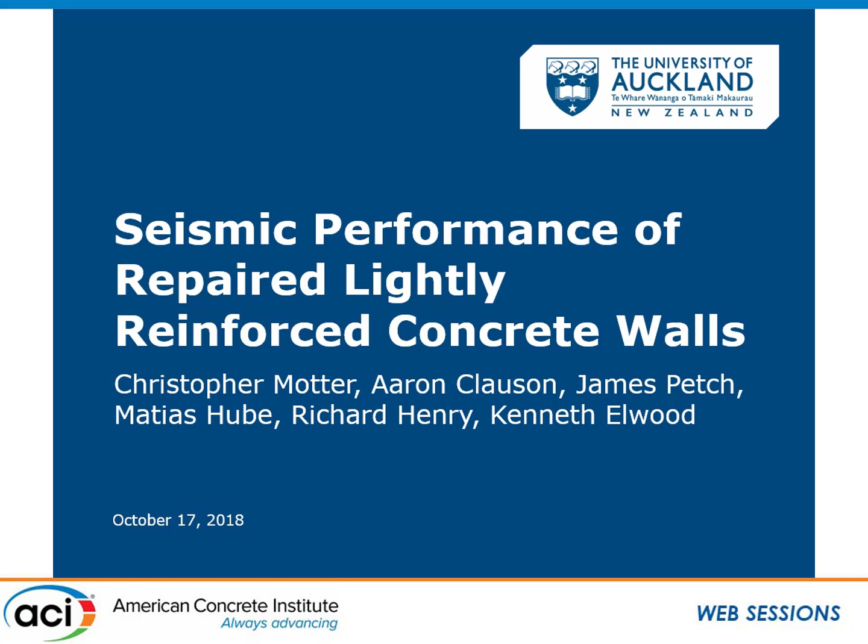The motivation for this research was the Canterbury earthquakes in New Zealand: the significant financial losses that occurred in those earthquakes, the time that the Central Business District was closed after the earthquake, and all of the assessment that went on afterwards to decide if structures needed to be repaired or could be occupied in their current state, and things of that nature.

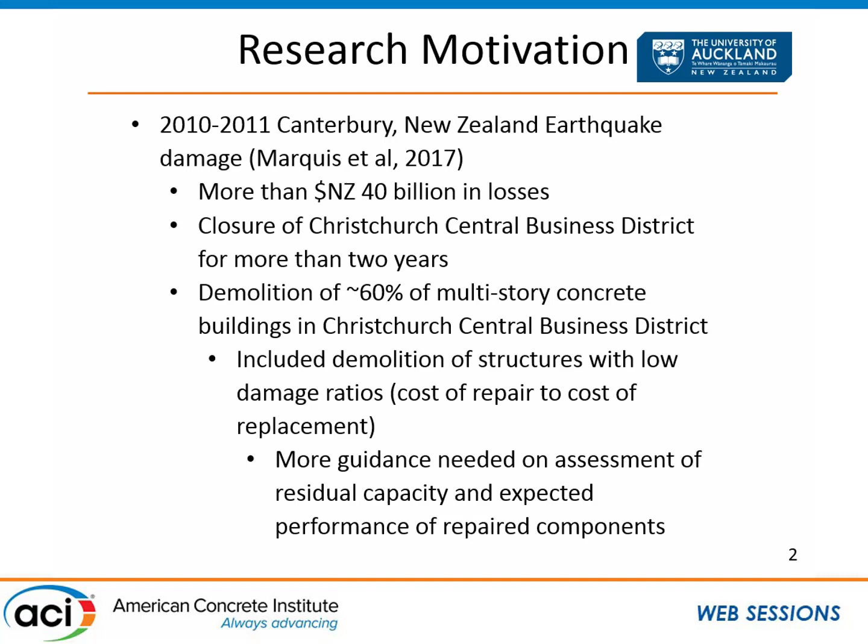In that process, there were a number of buildings that were demolished that had low damage ratios - the dollar amount needed to carry out the repair versus the dollar amount needed to replace the building. Some of that had to do with the structure of insurance in New Zealand at that time. But based on these numbers and stats, it was very clear that more guidance was needed on the assessment of residual capacity and repair.

The focus of this particular talk is going to be on structural walls. Here you see examples of damage that had occurred in the earthquake to structural walls, showing different types of failure modes - crushing failures, bar buckling failures.

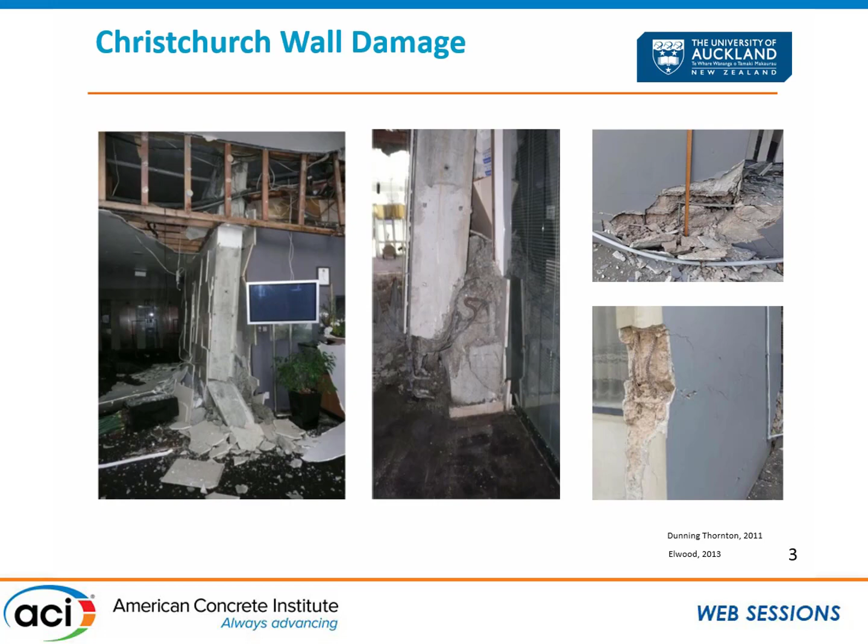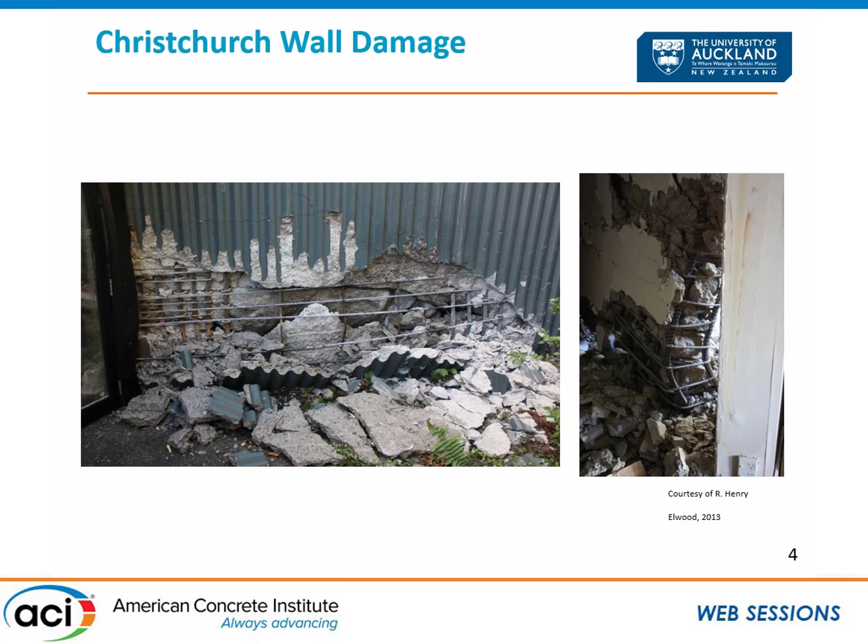On the next slide, there's an example of an out-of-plane buckling failure of the wall. Some of these walls were pretty well detailed, so these aren't necessarily older walls with deficient detailing. Some of these are more modern designs where we're seeing fairly heavy damage in the structural walls.

In our study, we are focusing on walls and looking at heavy repair. Ken is going to present a little bit later on repair methods for moderate damage, but this is really focused on repair to severe damage - cases where we need to replace concrete and replace reinforcement.

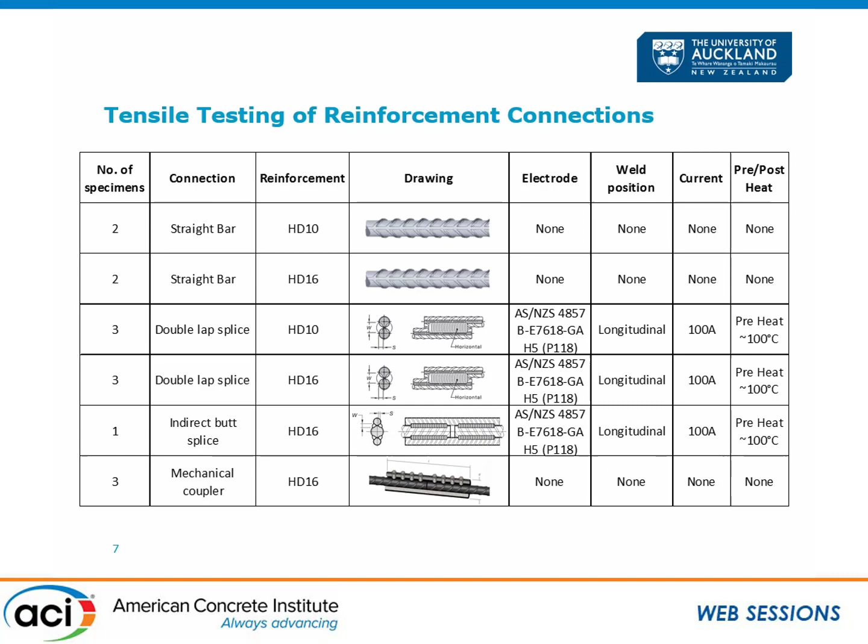We were looking at a double lap splice weld where the bars just overlap. We're looking at a butt splice weld where two bars come together and there are little splice bars along there that provide the connection. And then we also looked at mechanical couplers as a way to make that rebar connection. All of this came right out of the New Zealand standard on these welded connections.

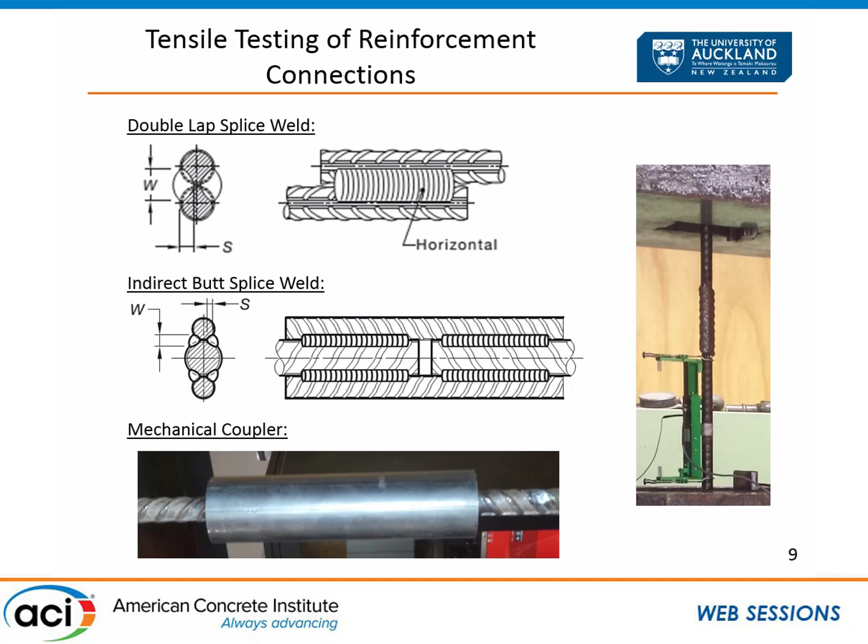This is showing examples again of the splice welds - the double lap splice weld and the butt splice weld, and then the coupler, and our rebar testing apparatus. The lap splice welds, not surprisingly, due to the eccentricity in those welds, created some bending moment on the bar itself right at the connection, and so those fractured early - they fractured at the connection earlier than the fracture would have occurred in the rebar.

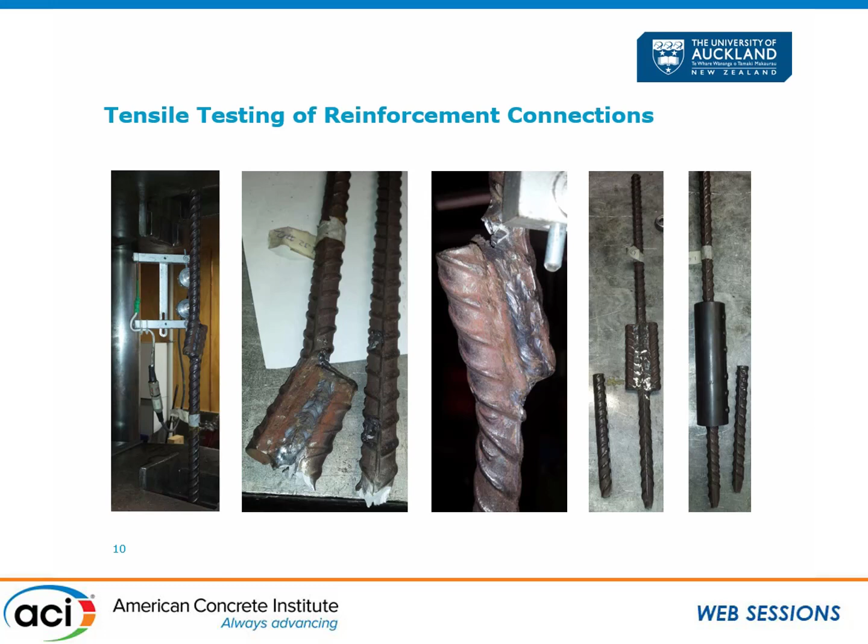Again, the double lap splice welds are not up to New Zealand standard. They had fracture before the strain had reached the elongation limit in the standard.

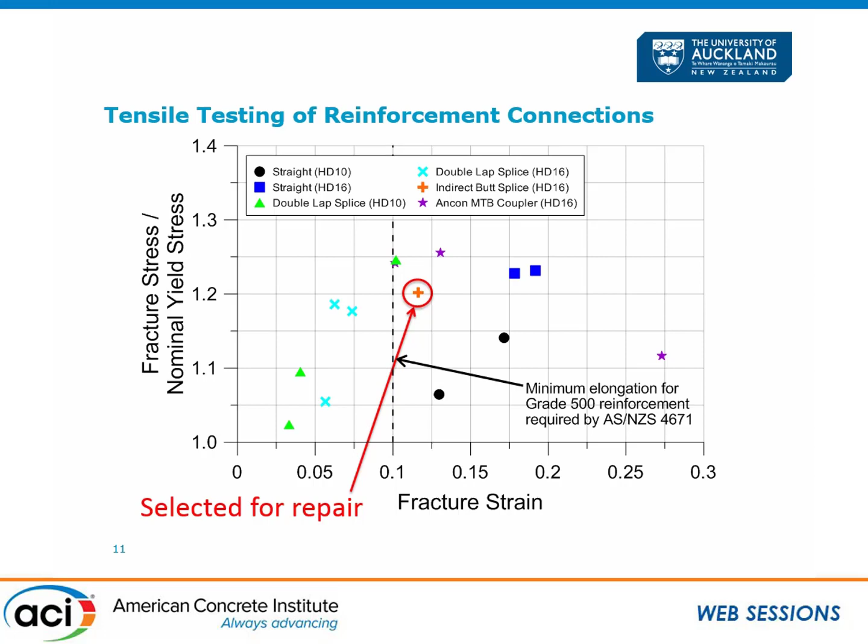So based on this, we were either going to go forward with the coupler or with the indirect butt splice, and we decided to move forward and use the indirect butt splice in our wall repairs. The coupler we decided was kind of bulky and a little bit hard to implement, so we went with this approach.

So I'm going to show now the test specimens. There were 2 test specimens in this program, and these were just leftover test specimens from completed tests that we had done as part of a previous study looking at minimum reinforcement requirements in walls. So these walls were lightly reinforced. They meet the minimum requirements in New Zealand, which are pretty similar to the minimum requirements in the United States.

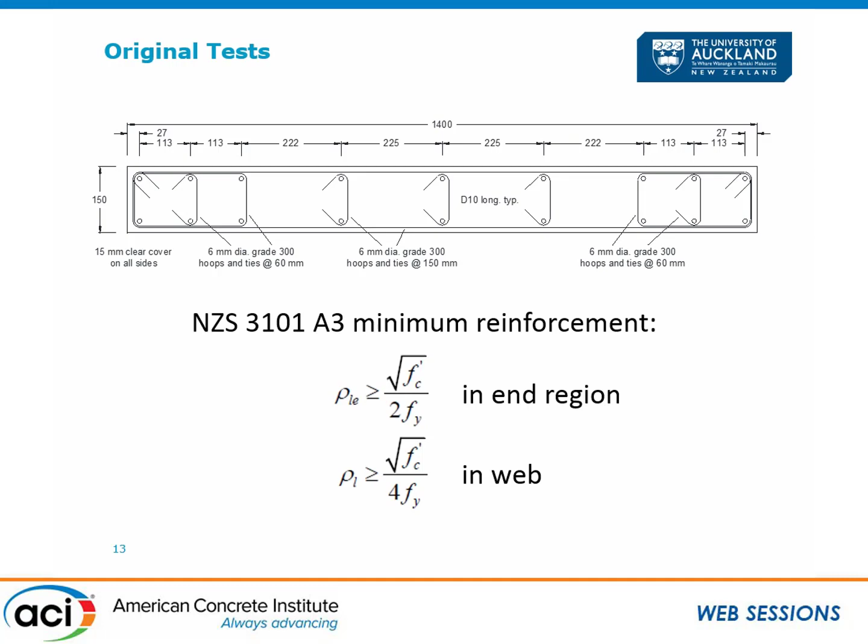I should point out those units are SI units rather than US units. But the walls did have boundary elements at the end, as you can see there, but generally very lightly reinforced. So this is a look at the load deformation response from the original 2 tests.

We're calling these M5 and M6, and I'll refer to that call out as we go along. M5 was a wall that was tested under a standard cyclic protocol. M6 was a wall that was tested under an earthquake record.

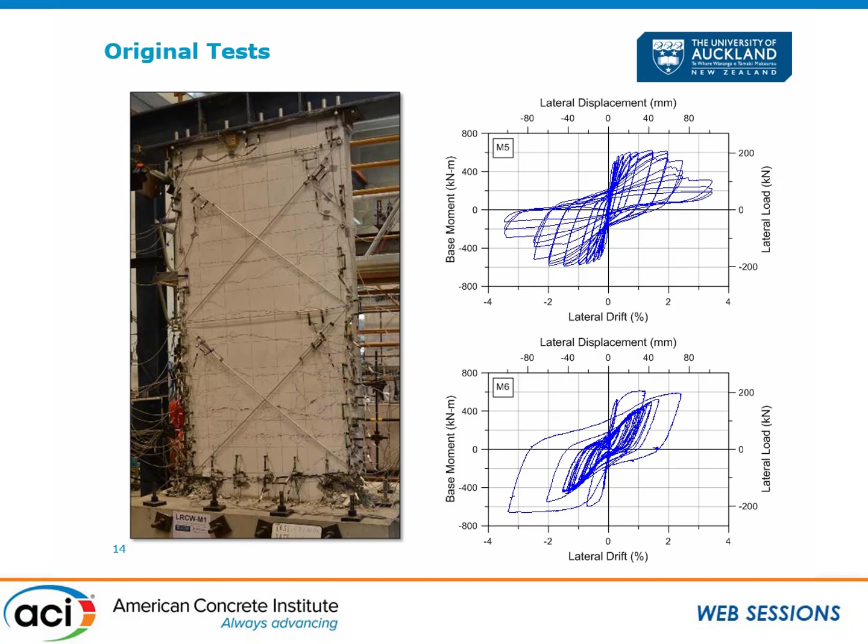So a nonlinear time history analysis was run to come up with the response of the wall in a particular ground motion, and then that response was used to test the wall. The first one was tested essentially to a state of failure, whereas M6 was actually not tested to a state of failure. So we had very different levels of damage at the end of the test.

You can see on the left there, M5, we have more damage in the boundary elements, crushing that's extending into the web. And for M6, we had more modest damage at the boundary elements and a lot of cracking through the wall.

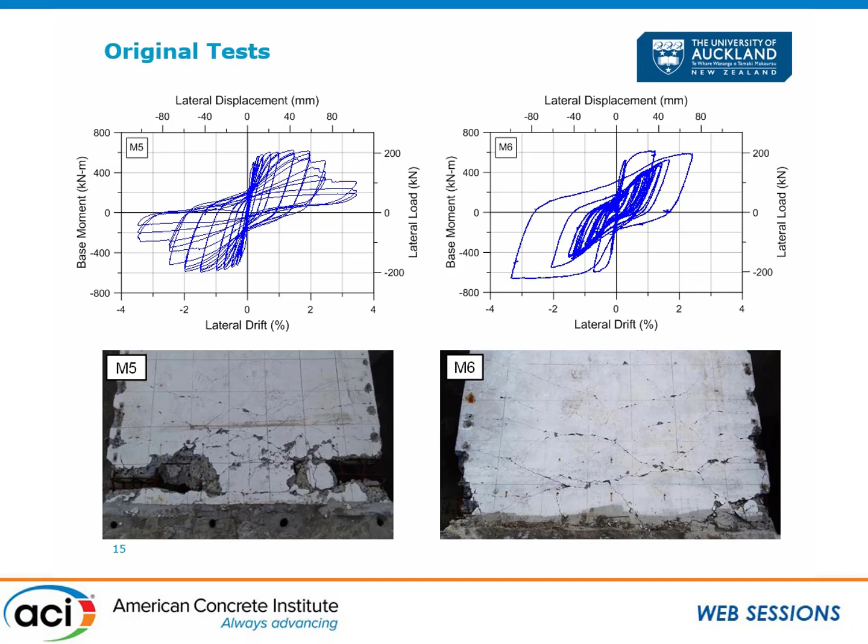So given the difference in the level of damage to the 2 walls, we made a decision that we were going to explore different repair techniques, different levels of repair for both of these walls. So for M5, and the designation I'm going to adapt now, the R indicates repaired wall. So M5 is the original wall, M5R will indicate the repaired wall.

So for the repair of M5, we decided that we were going to replace all of the concrete and all of the reinforcement essentially over the plastic hinge length. So the whole bottom region of the wall there, we're going to replace all of the concrete and reinforcement.

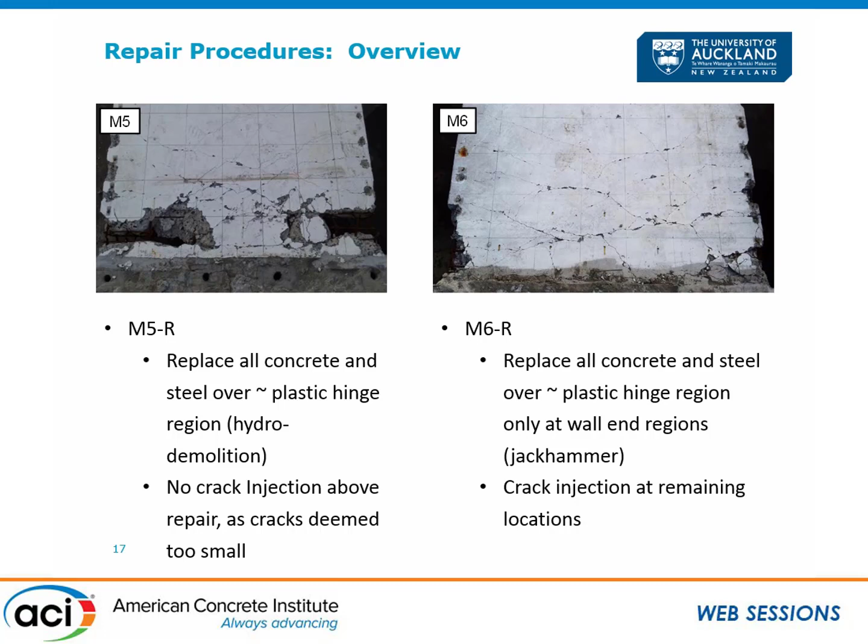For M6R, we decided that we were just going to replace reinforcement and concrete at the boundary elements. We weren't going to do replacement in the web, so crack injection in the web. So just showing schematically what that looks like.

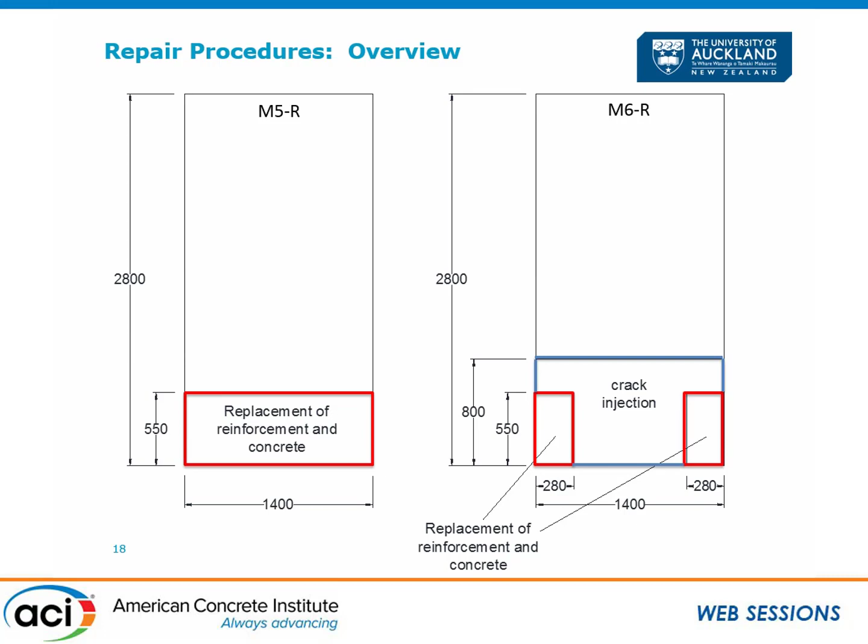For M5R, we're replacing the full plastic hinge, and then for M6R, just replacing at the boundary elements and doing crack injection in the middle portion of the wall.

So I wanted to go through the repair procedures that were used here. This was M5R, and we cheated a little bit for the repair. In an actual building, the walls would still have gravity loads on them.

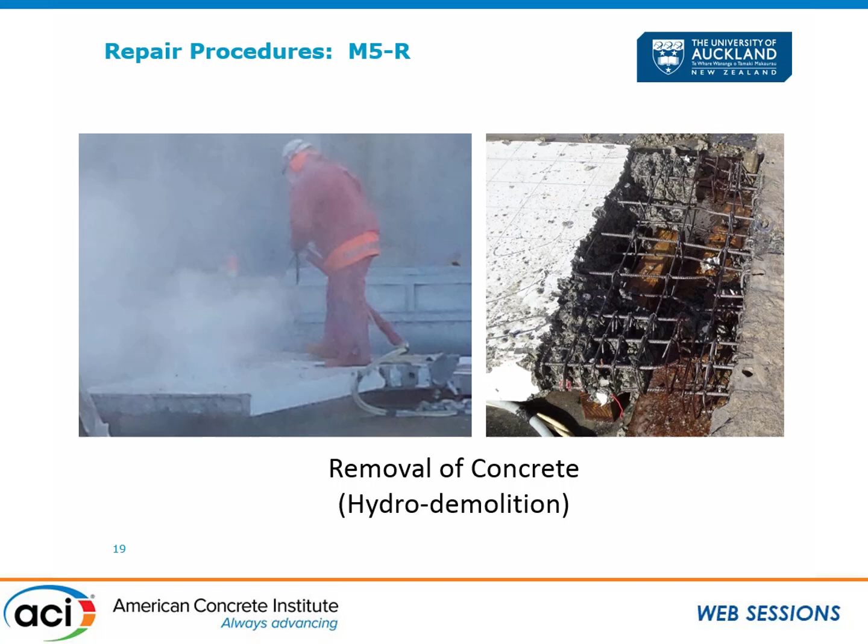It started off with hydro-demolition of concrete. This was a pretty cool procedure to watch. It's a water jet at high pressure that essentially blasts away all of the concrete and leaves you just with reinforcement. So the first step was hydro demo of all the concrete down in the plastic hinge.

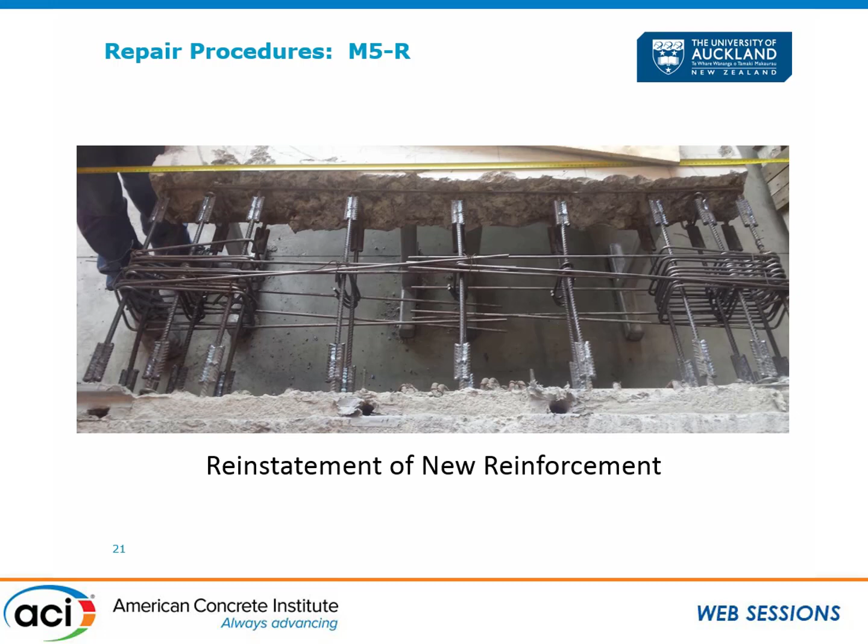Then we cut out all of the rebar and aligned everything back together, and then we reinstated the reinforcement. So this is where we were using the indirect butt splice welds to put in the new longitudinal reinforcement and also providing new transverse reinforcement as well. And this is what it all looked like when the new reinforcement was all tied up and ready to go.

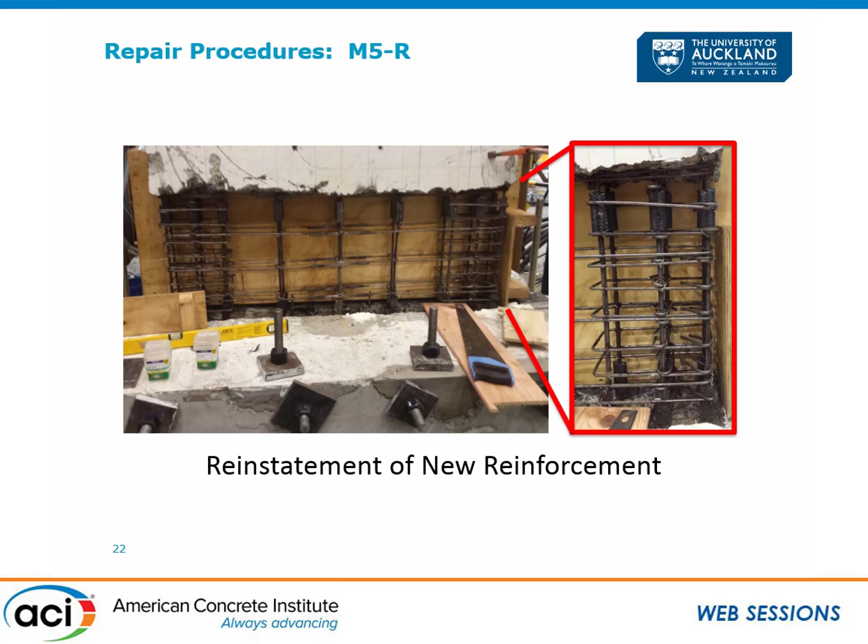We built formwork around the repaired region and used repair mortar to complete the repair. We didn't actually pour concrete into the specimen; we used repair mortar instead, poured right through a small opening at the top. There would have been formwork on this, but I'm showing a photo without it, poured right into that opening to complete the repair.

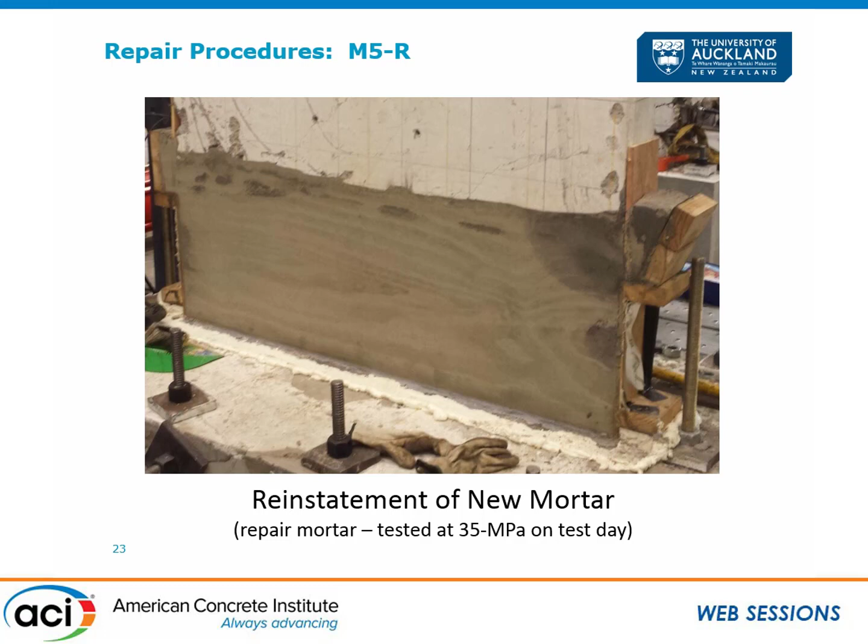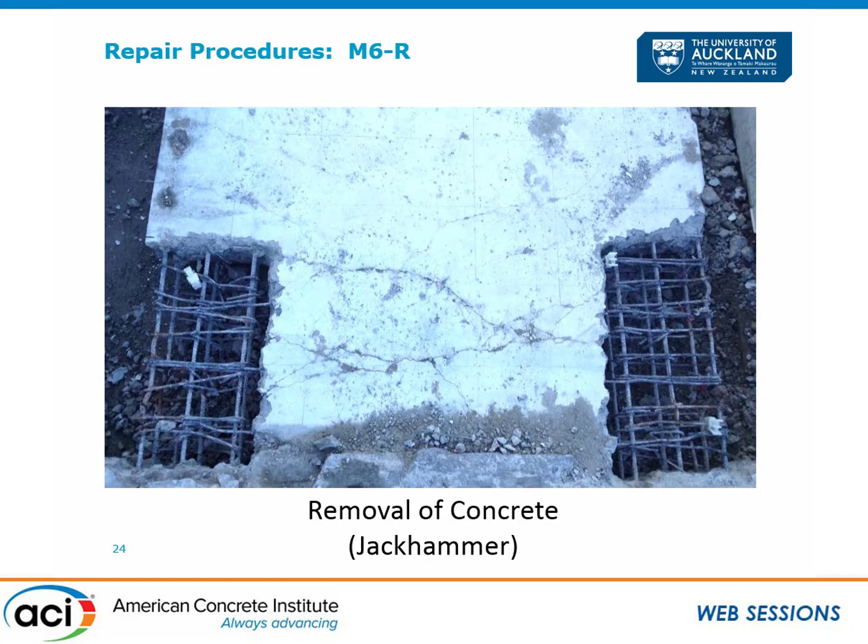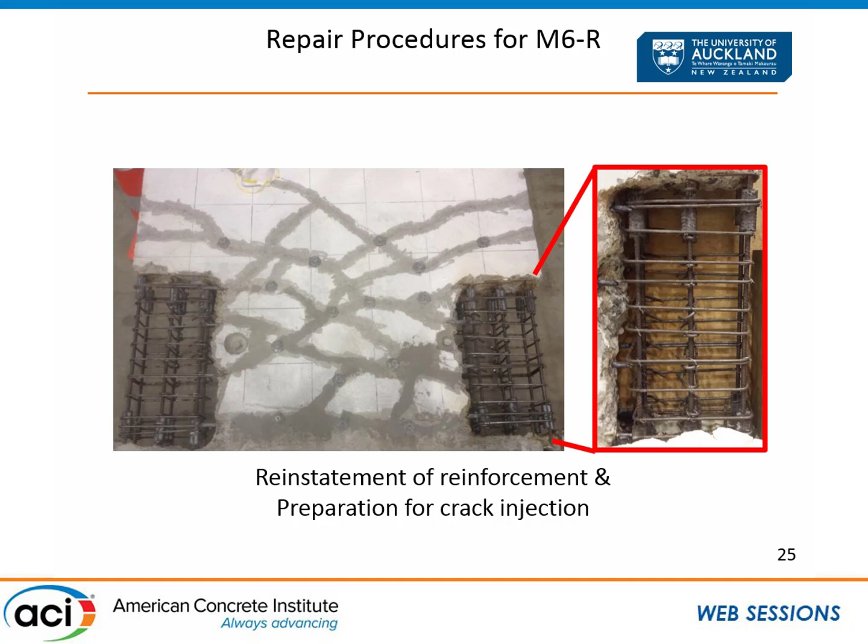For M6R, this was the one where we just repaired the boundary elements. We used jackhammers to break away all the concrete, expose the steel, and followed the same process as for M5R. We replaced all the reinforcement at the boundary element using indirect butt splice welds to reinstate the rebar in that damaged region, and also prepared it for crack injection over the cracks. Then again, poured repair mortar in through an opening to complete this repair procedure.

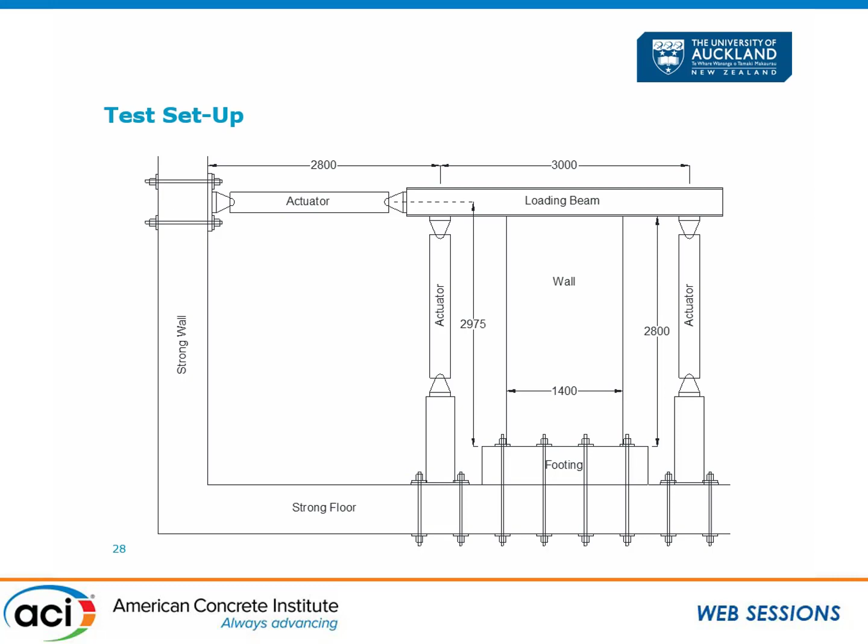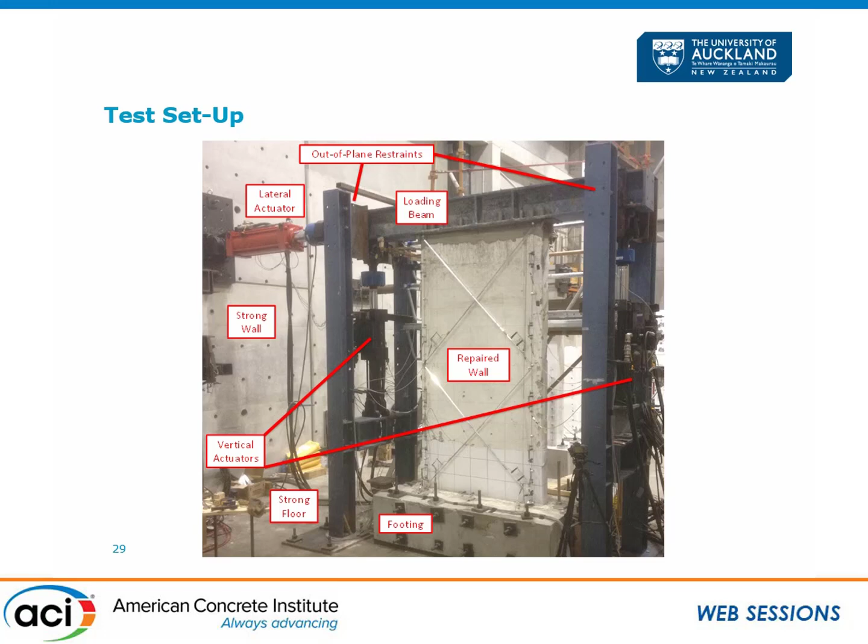You can see the repaired wall there with the nice shiny repaired region down at the bottom. We had some out-of-plane restraint on the loading beam to make sure everything was tested in plane. So it's just an in-plane test that we're doing on the wall.

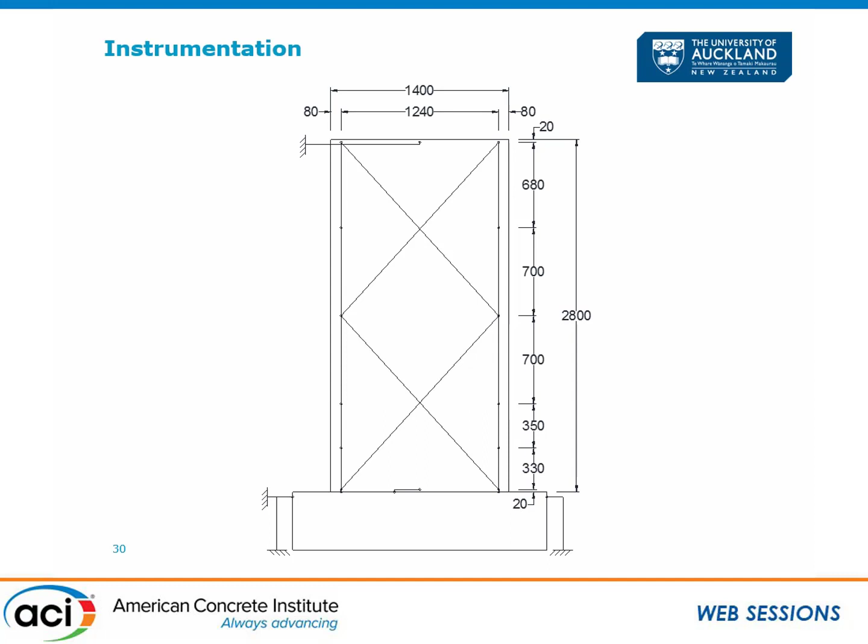Instrumentation is shown here. It wasn't a particularly heavily instrumented test, but we had enough sensors to get the sources of deformation - deformation from shear, deformation from flexure, sliding down at the base - and break down those components of deformation.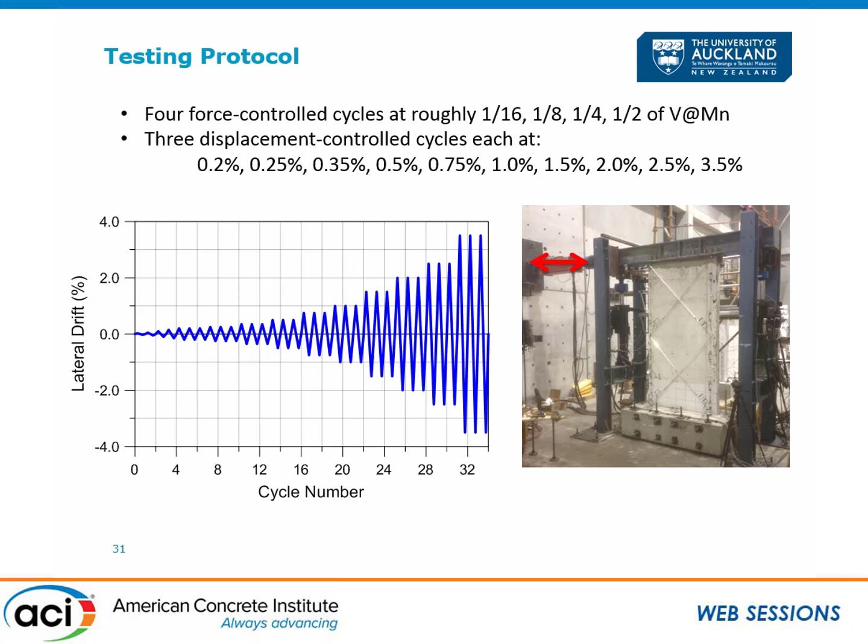For the testing protocol, we used a standard cyclic testing protocol for both tests. If you remember, one of the original tests had been an earthquake protocol, but when we did the repaired test, we used a standard cyclic protocol. So most of my comparisons are going to compare to the original test that had the standard cyclic protocol.

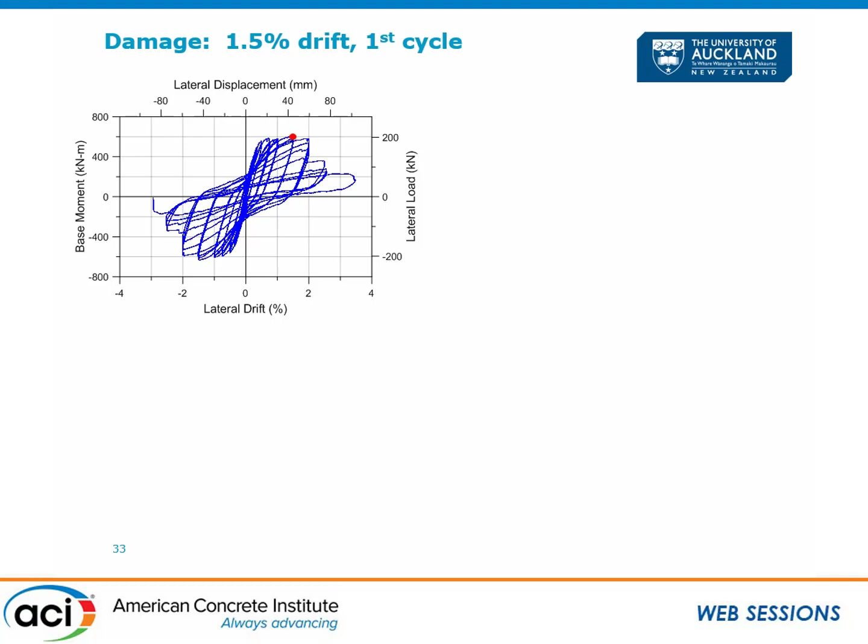Getting now into the test results, I just wanted to quickly go through the progression of damage that we saw in the test. This is just one example - M5R. There's the load deformation response in the upper left-hand corner there. We got out to about 1.5% drift, and this was the state of damage at that point.

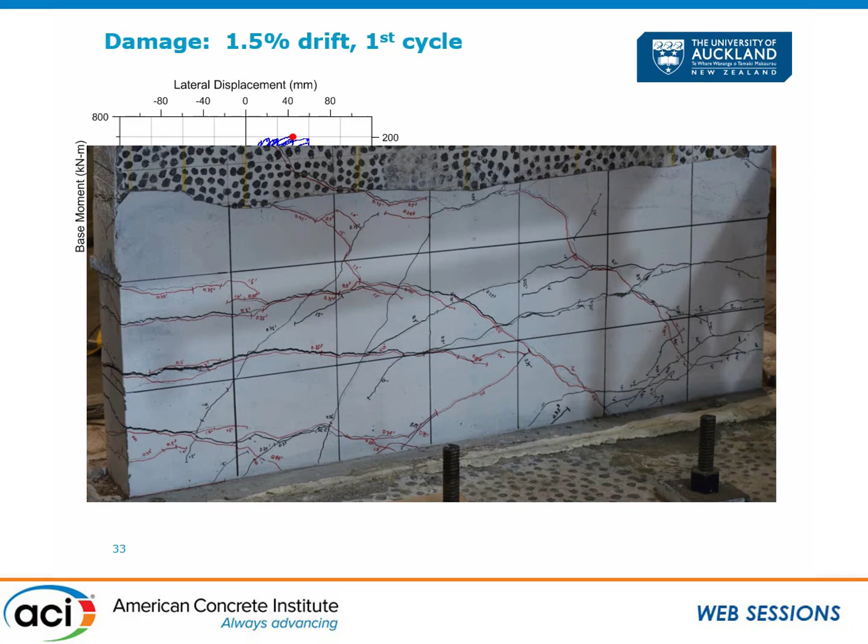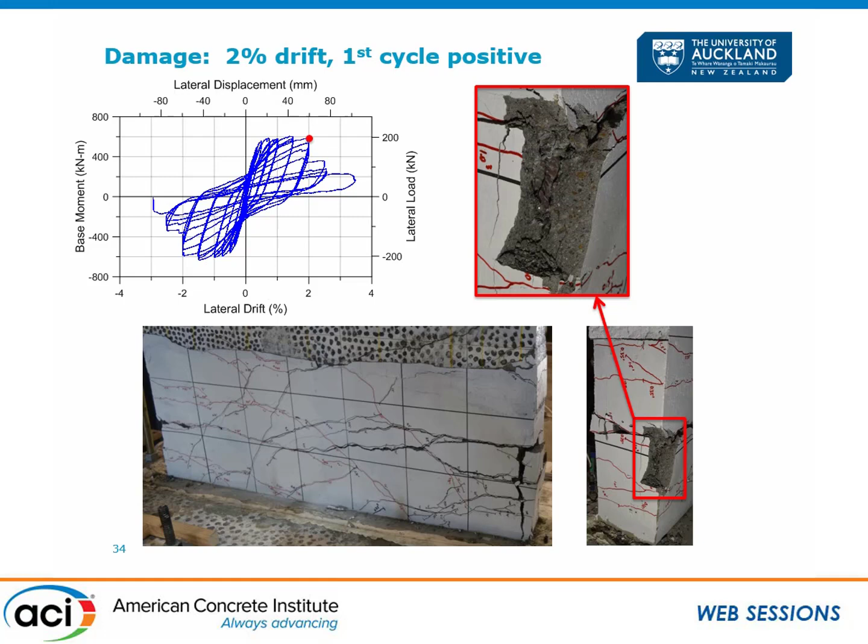Certainly there was cracking as we would expect, but we didn't see spalling at that phase of the test. Then as we got out to 2% drift, we got some spalling of cover concrete, and that was where we first had buckling of reinforcement. Same thing in the negative loading direction - we picked up our first bar buckling at 2%, spalling and bar buckling, and it progressed from there.

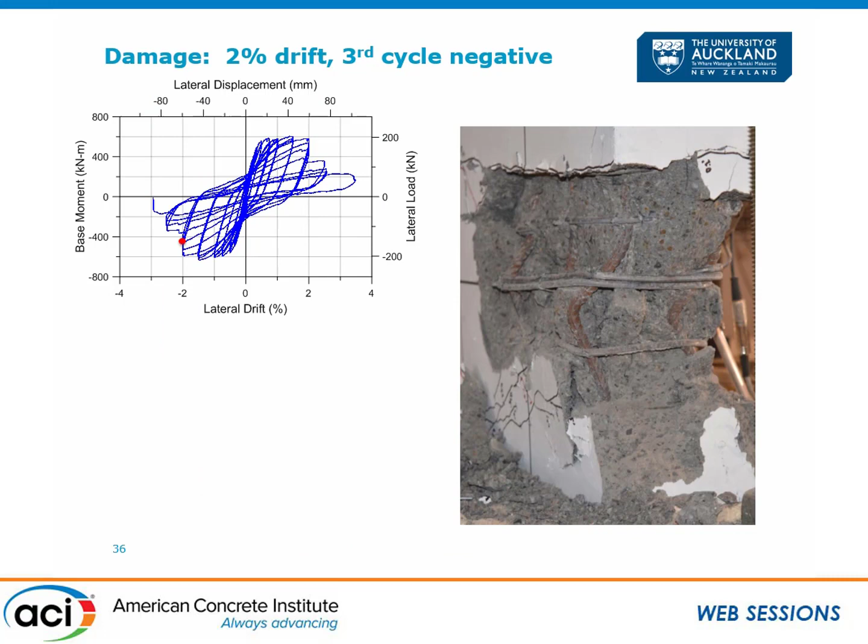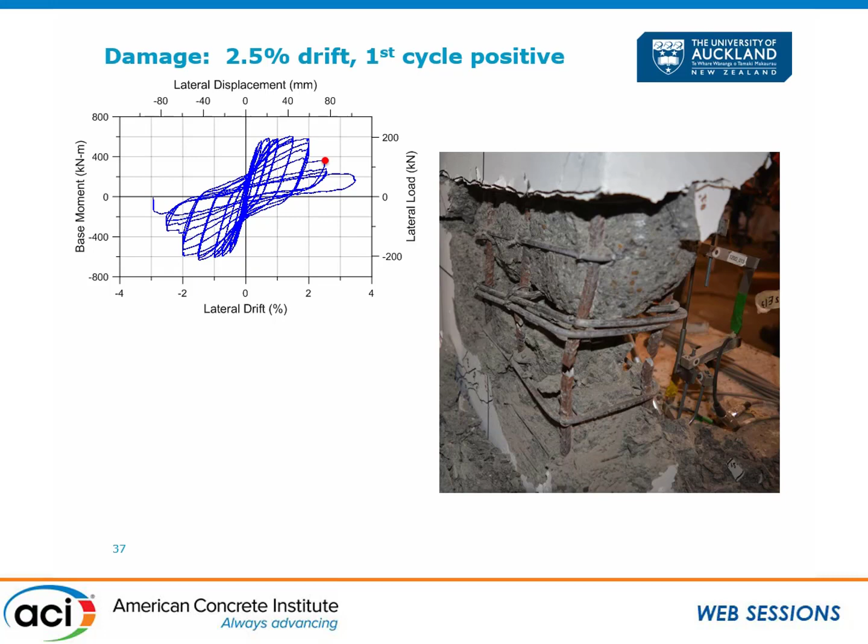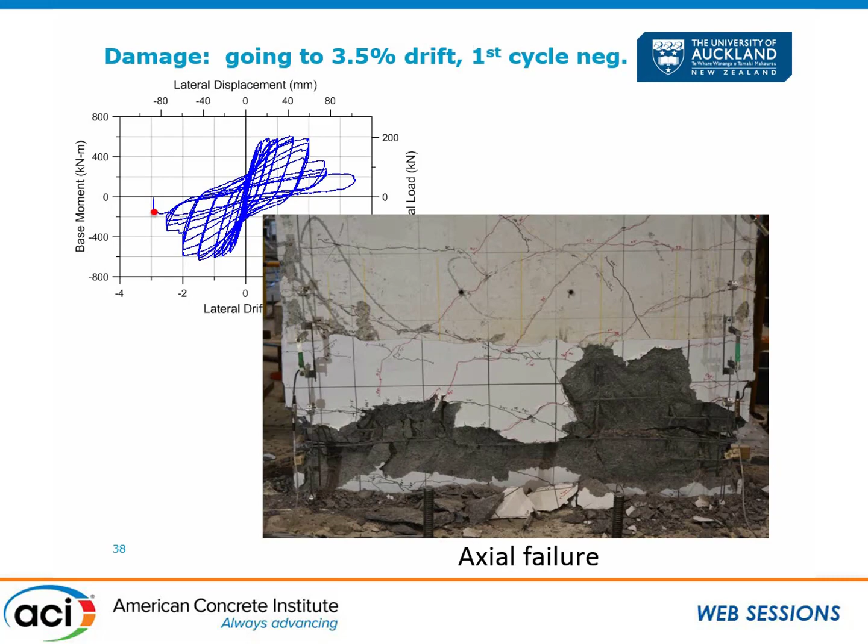As the cycles continued at 2%, the buckling became more severe, and we started to get a little bit of out-of-plane movement of that wall. As we continued loading out to 2.5%, we fractured reinforcement, and that's when we started to really get a significant drop in strength, as you would expect. We continued along and were loading out to 3.5%, which was the original protocol. As we got out to about 3% drift, we got an axial failure, crushing failure of this wall.

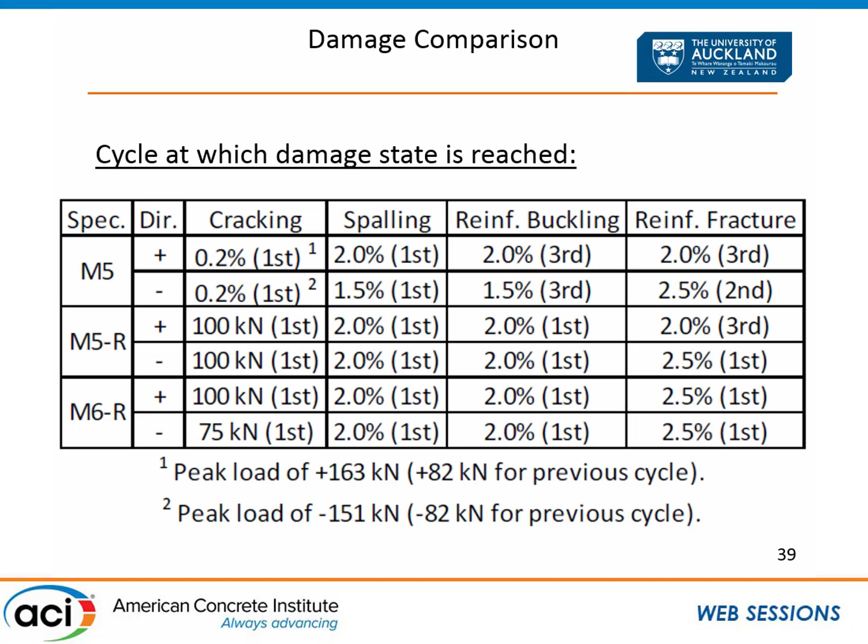So that was just an example of one of the tests, the type of damage that was observed. But this table here is showing a comparison of the first observation of each of these damage states - the first cycle at which we observed spalling, buckling, and fracture. Without getting too much into the details, the main point here is that the three tests were fairly consistent, so the damage states were occurring at fairly consistent points in the test, suggesting that the damage pattern for the repaired walls was matching that of the original walls.

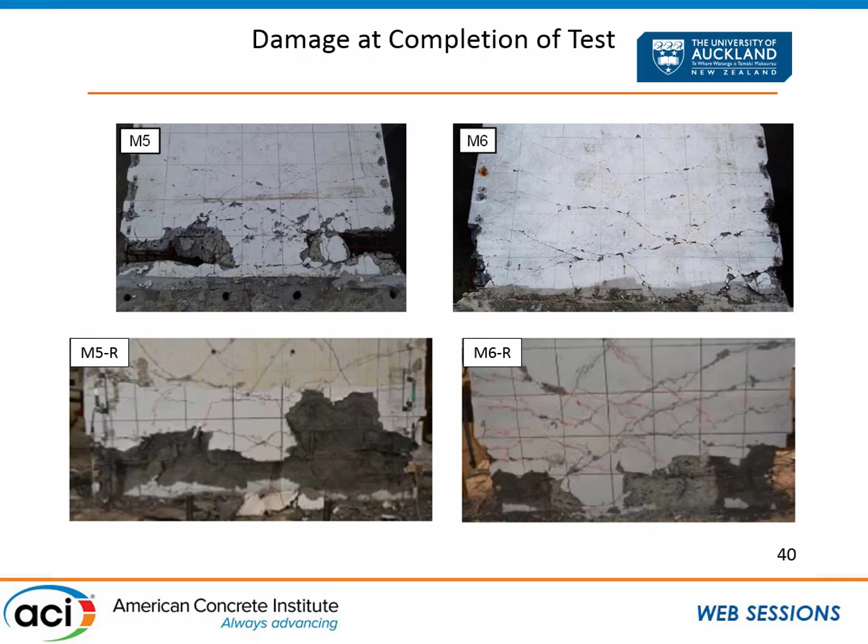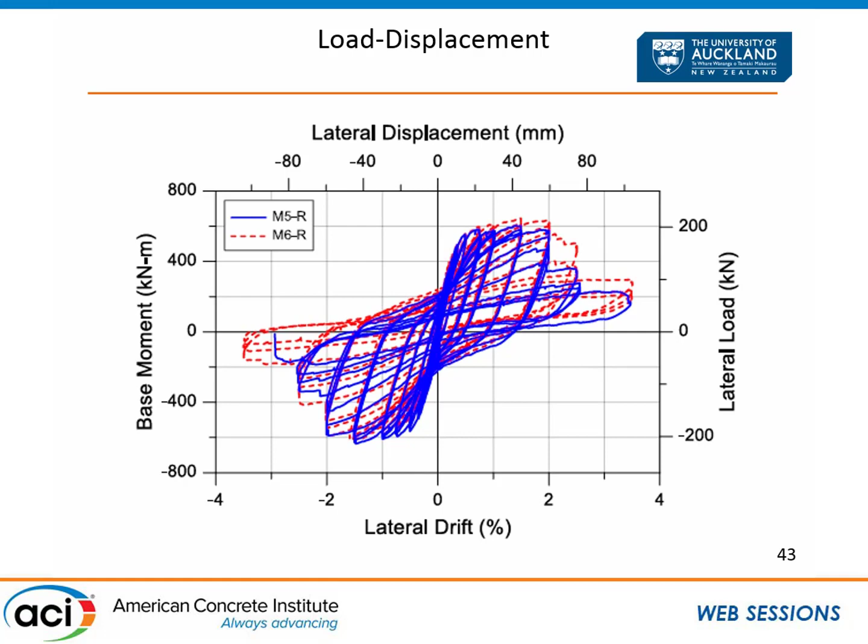Backbone curves: the main thing I wanted to point out is that although the backbone curves are pretty similar out to 2% drift, there was a difference in the initial stiffness, shown in the tabulated values at the bottom right.

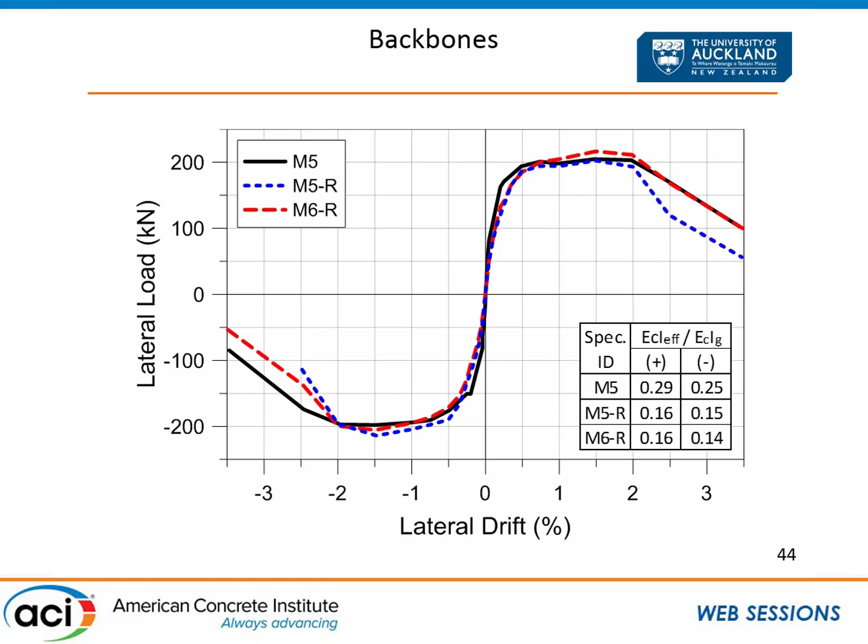The stiffness of the repaired specimens decreased by about 33% to 50%, so roughly a 1/3 to 1/2 decrease in stiffness relative to the original tests. I'll get to that a bit more.

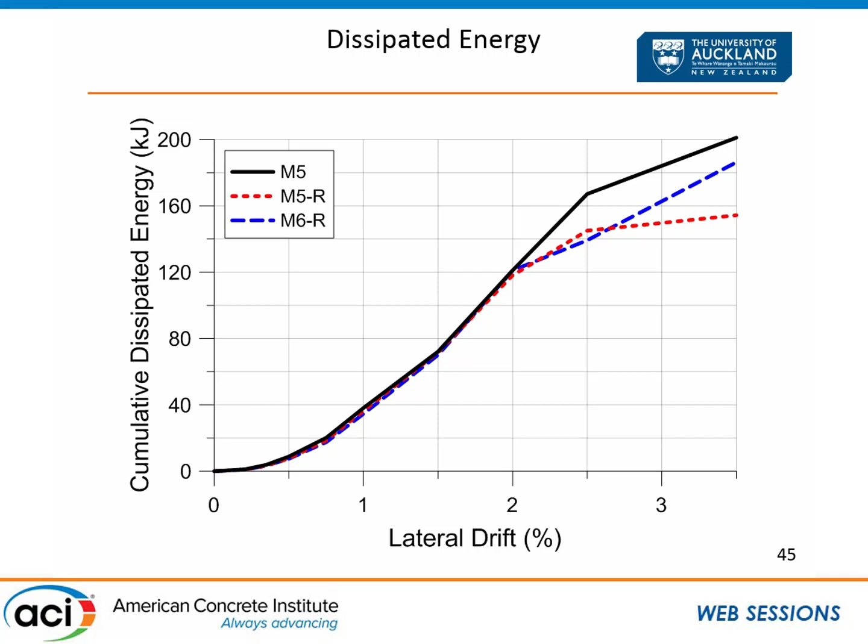Dissipated energy, shown as the area within the hysteretic loops, was very similar out to 2%, at which point the repaired specimens degraded a little faster.

This is the components of deformation measured during each test. Again, we see similar values between the repaired specimens, shown at the top, and the original specimen, shown at the bottom left—similar trends in the data. Most of the deformation is coming from flexure, contributing on the order of 80% of the deformation.

But if we break that down further, in the plot at the bottom right, this shows the percent of flexural rotation coming from the unrepaired portion of the wall versus the repaired portion. What we see is that the unrepaired portion of the wall is giving us more deformation than we had in the original test.

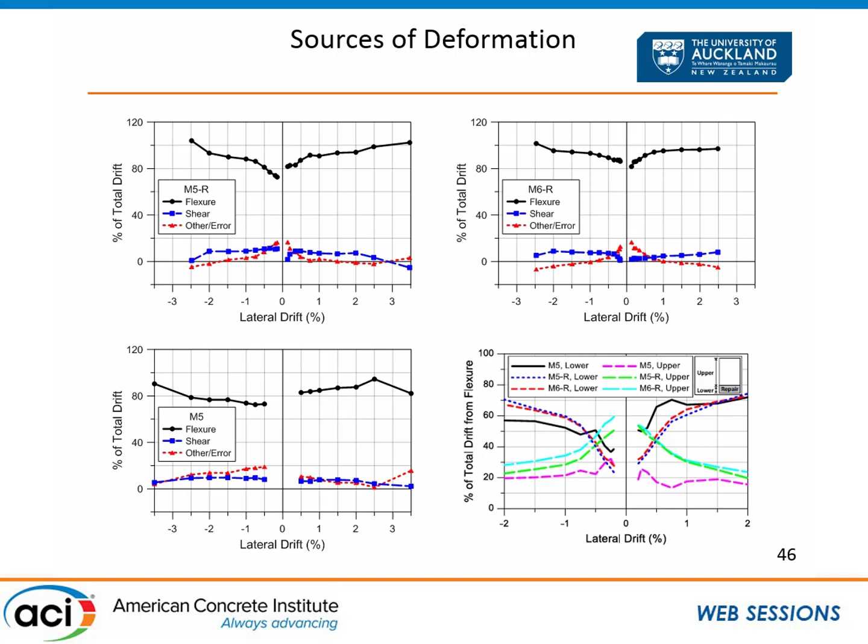If we break that down into stiffness measured in the repaired region versus the upper, unrepaired region, we have a match between the repaired specimen and the original specimen in the repaired region. So we were able to restore the stiffness in the repaired region.

But in the upper region, where we didn't do any repairs, we've actually lost some stiffness, as you can see in that plot.

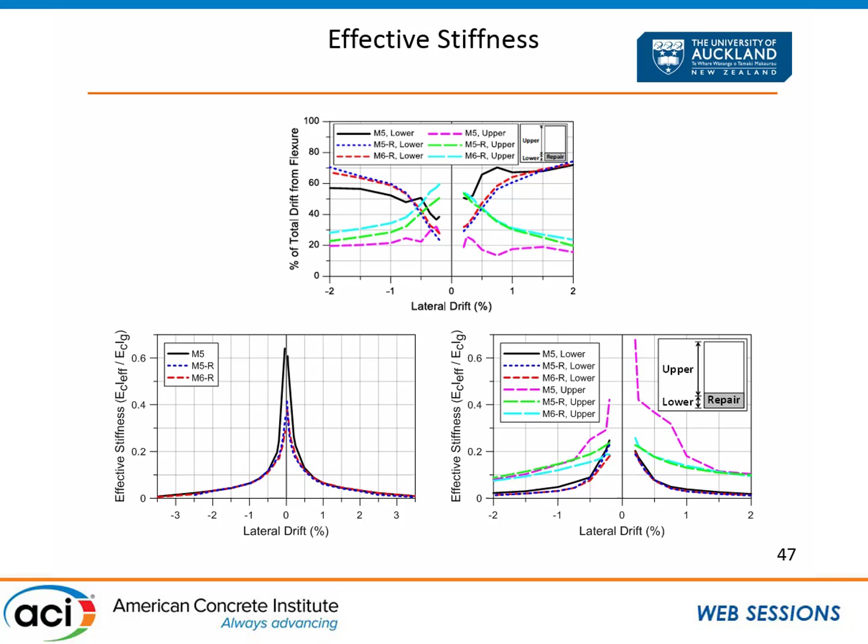To conclude, the performance of the repaired specimens was similar to the original specimens out to about 2% drift, at which point the strength degradation for the repaired specimens was more rapid than for the original specimen.

The approaches we used worked well in this particular instance. The indirect butt splices showed no weld failures observed in the tests. When we had bar fractures, they weren't actually at the welds.

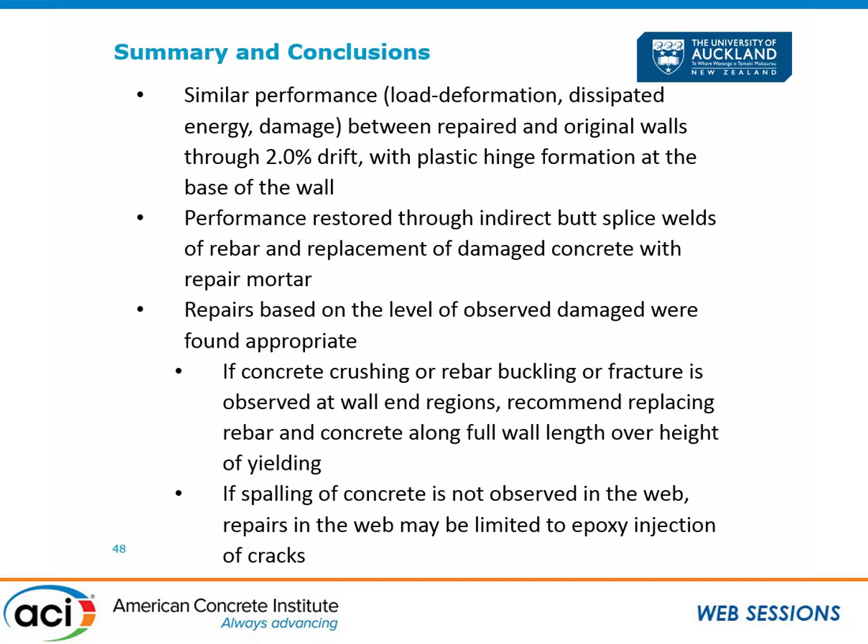The strategy we used to decide on the level of repair also worked out. We didn't see any issues with damage at the joint between the repaired region and the unrepaired region.

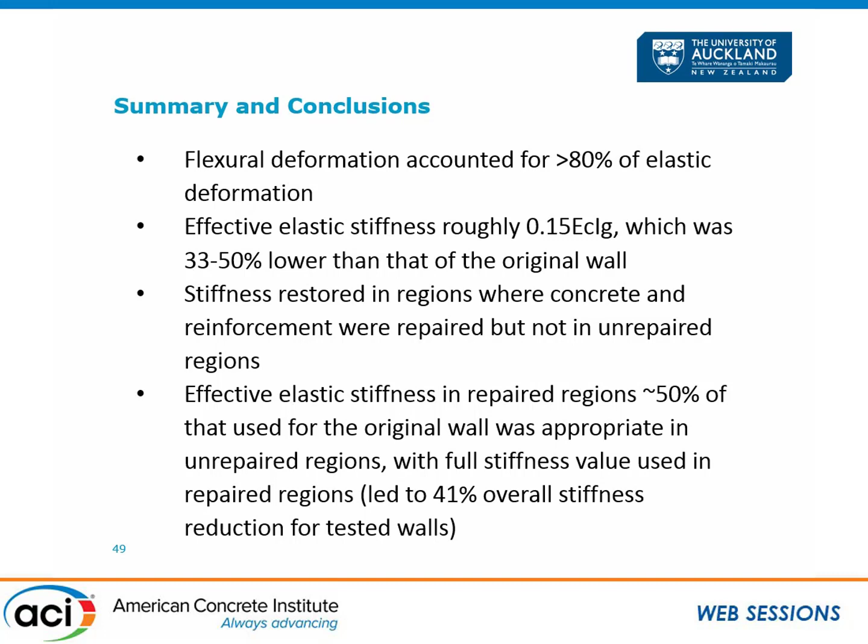Flexural deformation accounted for about 80% of the elastic deformation. Breaking that out further, we did lose some stiffness in the unrepaired region—about 50% stiffness loss there.

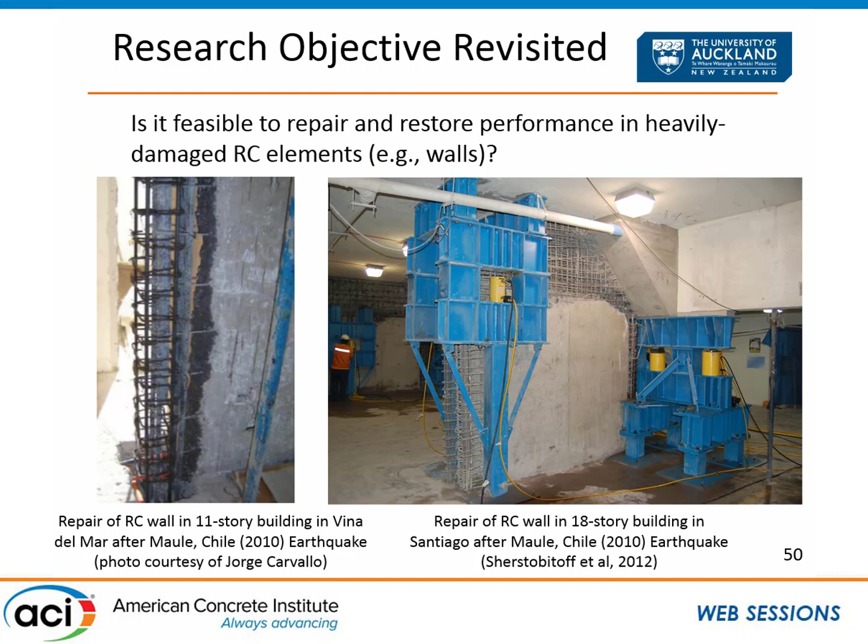Coming back to the original question, is it feasible to restore the performance when we go through these types of heavy repairs? Based on our study, the short answer is yes. Of course, we only did two tests, so I don't want to extrapolate too far beyond these results, but it was a case where we were certainly able to restore the performance of the specimens.